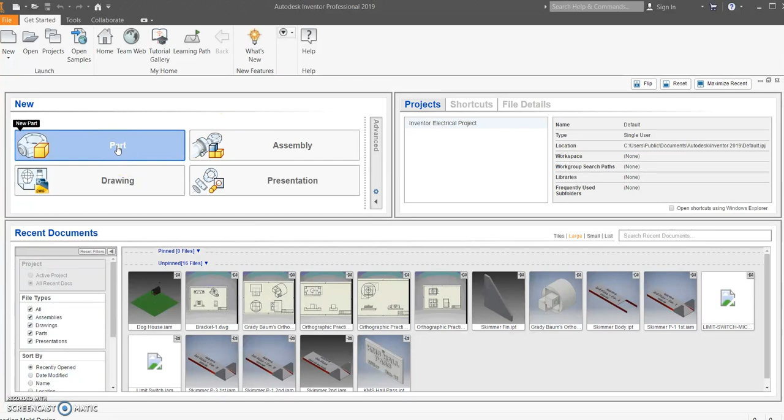What I'm going to show you how to do is make the house and constrain a roof on top of it. We're just going to do a part file, so click on part. This is the most basic way to make this house, and if you decide to do it more complex, that's fantastic. But for those that are struggling, it's just a basic way to make a house for your dog.

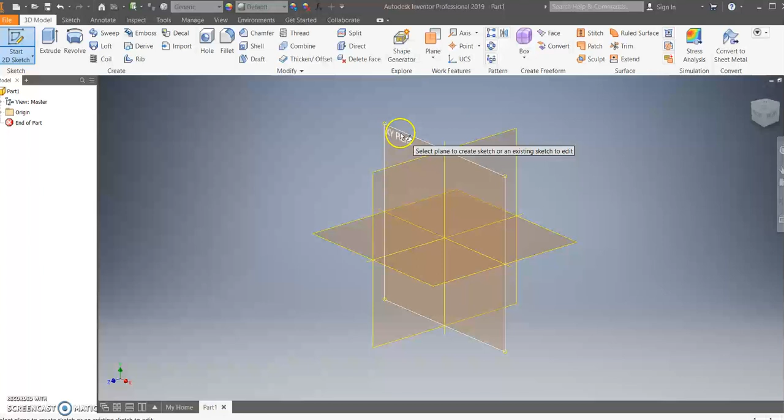Alright, so we're going to do a new sketch, start a sketch. You could either use the XZ plane or the XY plane, it does not matter to me. I'm going to use the XY plane, and then I'm going to put a rectangle, and in this rectangle I'm going to use the 2-point center, so it starts in the center and moves out. So here we are, start in the center, move out.

Now this is for a medium-sized dog, probably going to be about 18 inches tall, maybe 12 inches wide. So we want something that's big enough for him. Most of the dog houses that I've seen are going to be right around 48 inches. So we're going to go 48 inches and then push the tab button.

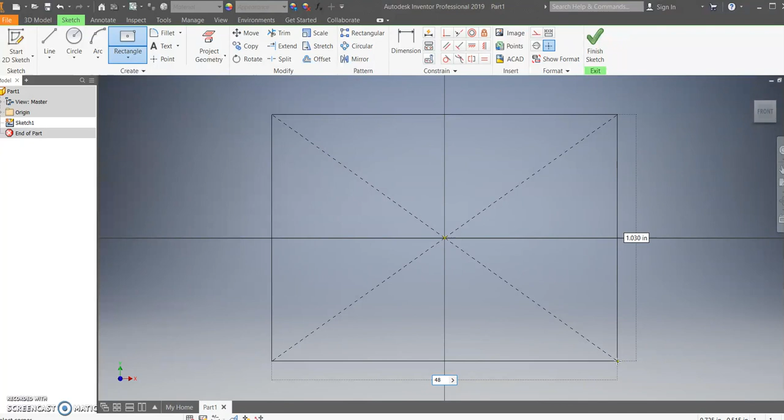And if I zoom back out, there's the other one. So we want that to be, we can make that 48 as well. So the 48 we already have is the front, and I'm going to make mine 60 inches deep - actually it's 60 inches tall. Finish the sketch, and then we're going to extrude that out.

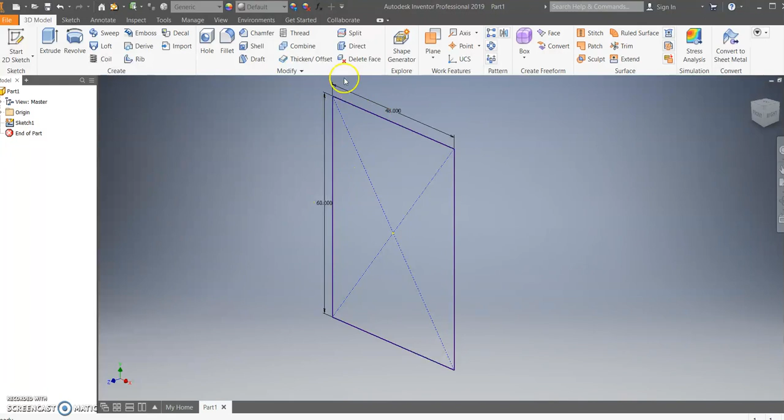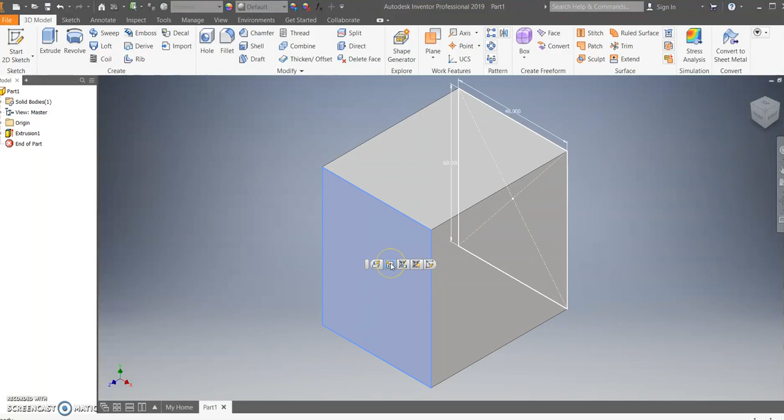And I want to extrude it out 60 inches. Now, I think that's too tall, so if I just do a regular click on the front of that, I get options that come up. You probably only have 3 options. I want to go to this second one, and it shows me my dimensions, and I want to change that 60. Let's do 40.

Okay, so I've finished the sketch. Now that's what my doghouse looks like. This is the front, sides, top. So what I want to do is shell out the top.

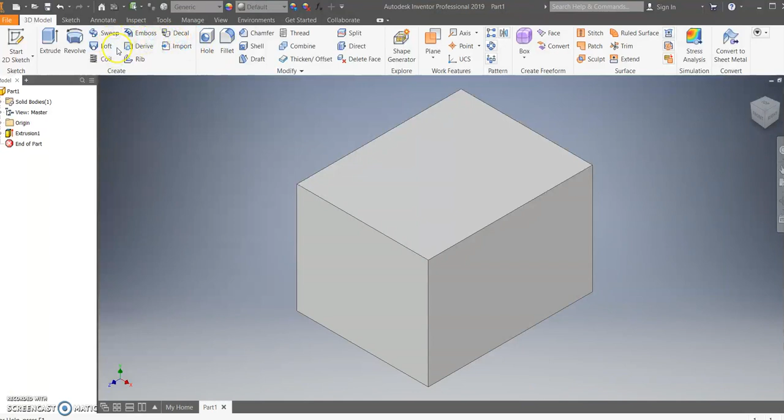Shell out the top. So here I'm going to click the shell button and then just click on the top. Now this 0.1 is telling me how thick my walls are. So I want a half inch thick walls, and I can even go 1 if I wanted - just gives me thicker walls.

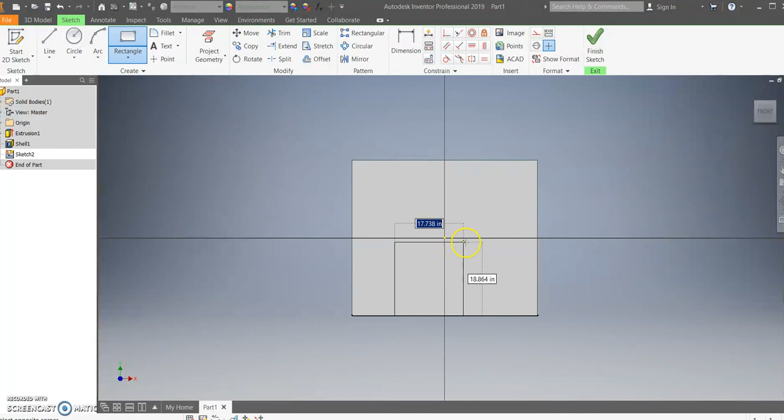Okay, so there's that. I want to put a door on the front, so I'm just going to right click on the front and do a new sketch, and there it is. So now I want to do a rectangle. This time I want to do just a 2-point rectangle, so I can start at the bottom here, and you can make this whatever you want.

So I'm going to dimension this. Again, my dog's probably 18 inches tall, so I definitely want to go more than 18. Let's go 24. And then wide doesn't need to be as wide, so I could go maybe 18 inches, just like that.

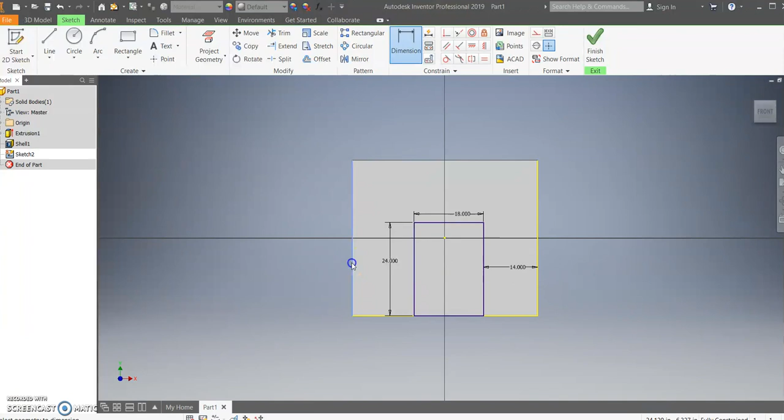Okay, now I just pushed escape to get out of the dimensions, and I can now move this to wherever I want. So I can dimension from here to here, make that 14, and from here to here should be really close. That's 16, so they both should be 15.

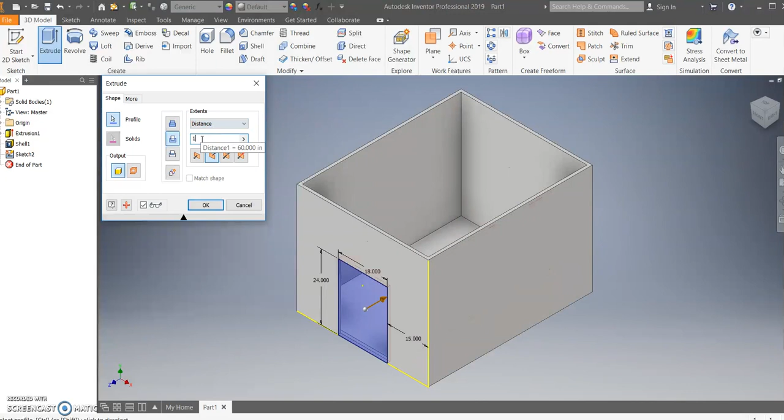So I'm going to exit out, click dimension again, and change that to 15. That'd put everything in the center. Finish the sketch, and then I'm going to extrude, and do this cut button right here. I don't want to cut through both sides, he just needs one door, so I'm going to go distance, and change it to - remember my walls are 1 inch thick, so make sure it's 1 inch. And there is your dog house.

Alright, so we're going to save this. I'm going to call mine basic doghouse, and save.

Now I want to put a roof on the top of this, so I need to do a new - I can go back to my home and start another part file. And on this part file, again, do a new sketch. I'm going to do the XY plane again, and just make a basic triangle.

So I could do underneath rectangle, go under polygon, and instead of 6 sides we want 3 sides. When that's selected, then I'm just going to do this. There it is. And now I want to dimension the bottom.

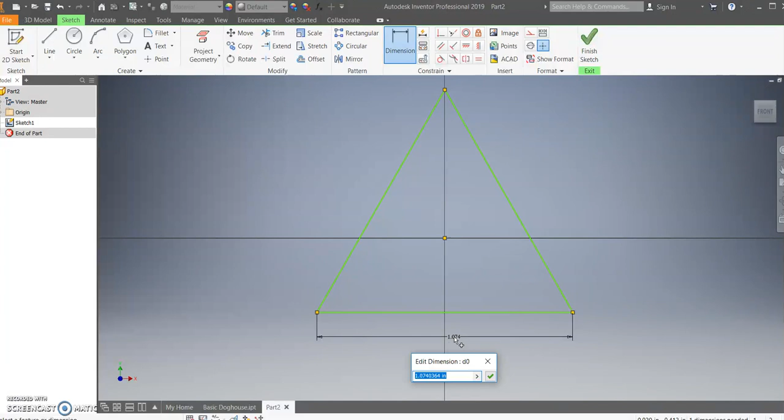So I think the width of my doghouse was 48 inches, if I remember correctly. So I'm going to finish that sketch and hit the home button. There's my 48-inch triangle. Now I'm going to extrude it out, and I think that it was 60 inches long.

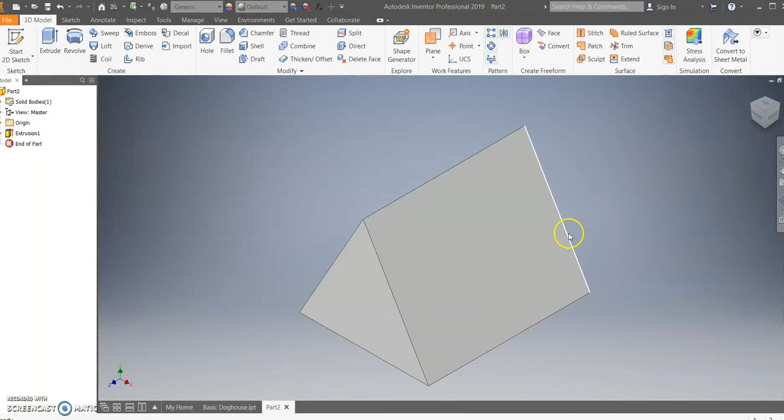So there's my doghouse. So I'm going to save this. Save this as basic doghouse roof. Basic doghouse roof, and save.

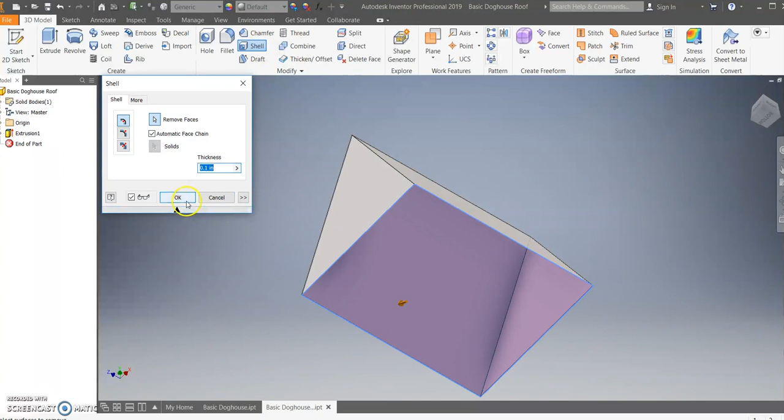Now I could also shell out the bottom of this, so I can click and just move that to the bottom, and I can shell out the bottom, say OK. Now I've got this roof that has no interior.

Okay, alright, so I'm saving that. I'm going to go back to my home. Now I need to put the doghouse and the doghouse roof together, so I'm going to click Assembly and start a new assembly.

And up here where it says Place, we're going to click Place, and then I want to put my basic. I need to make sure you're in Documents. That's where everything's going to be saved for you. So basic doghouse.

There's my basic doghouse, and then click Place again and go to your basic doghouse roof, if that's what you called it. And there's my roof. So I'm going to say OK.

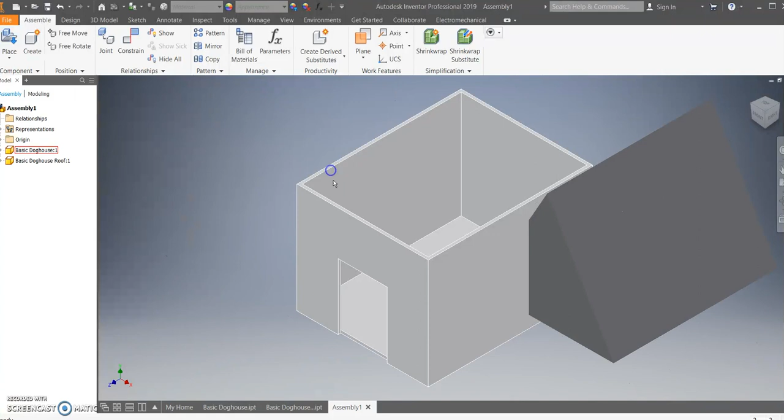Alright, so now we're going to constrain the roof to the doghouse. So I'm going to click Constrain, and I want to put it right on top. You see that? So there's a ledge. Remember, that's a 1-inch ledge there. So I'm going to click right on that ledge.

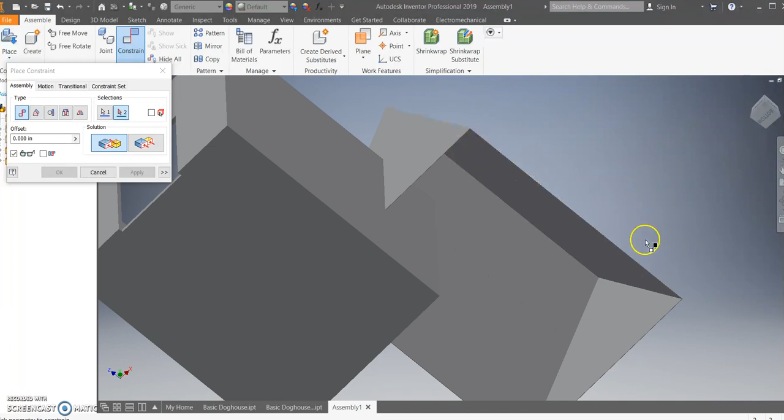And then I want to click on the very bottom ledge of the roof, so I really gotta zoom in. See that? See, this is the bottom. I'm going to really zoom in on that bottom ledge and click right on that. And see what happened if I click OK. This now is on top of that, and that's what I want.

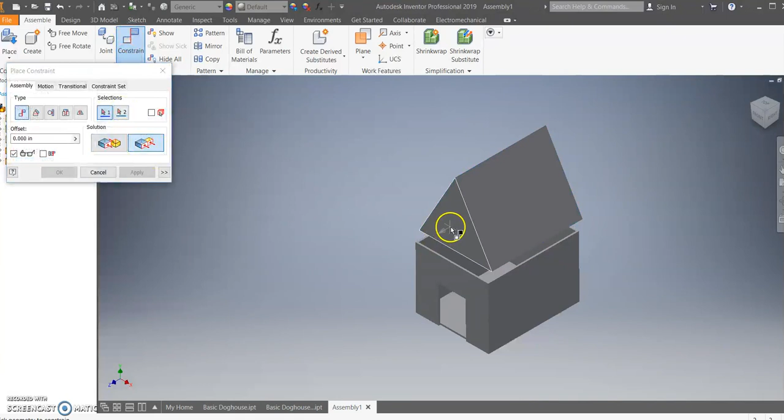Next one's really easy. I click Constrain again, but this time I have to flush the front of it. Front to the front, just like that. Okay, now if I click OK now, this thing's going to move back and forth like this.

Alright, would you click on this, see if it turns blue, and then right click and ground it so it doesn't move. So now the only thing that moves is this.

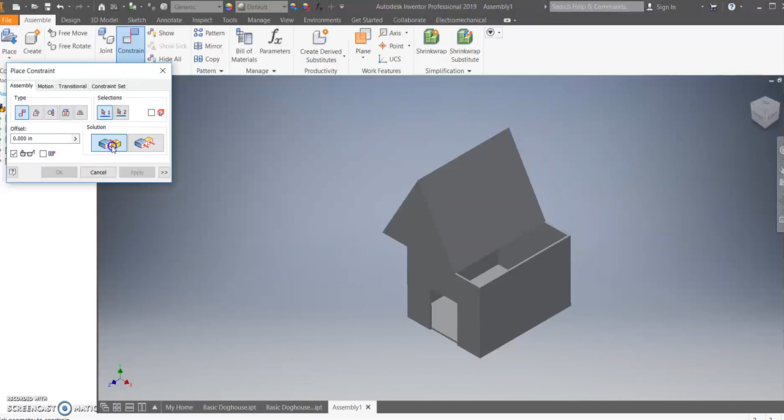And the last constraint is going to be a mate. Normally it's a flush, but because we have an angle here, we have to use another mate. So I'm going to zoom in. See, when you turn this, just that line shows up. That's what we want. Just hit the line and hit the side. And click OK. And now we have our doghouse.

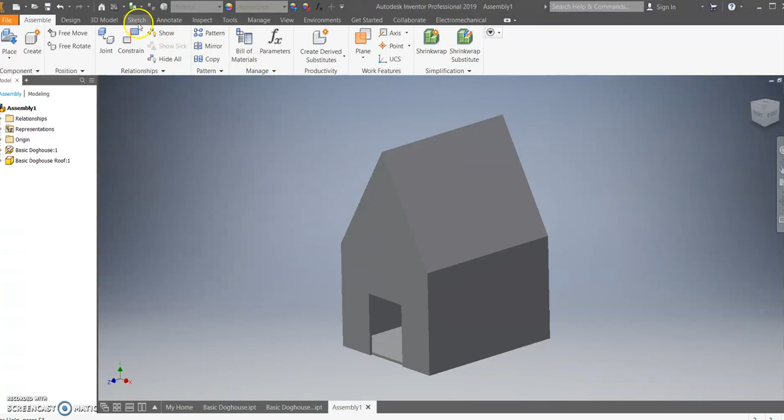Okay. And now you can change, if we go up here to Tools and Appearance, and I can type in wood. It gives me all kinds of different wood options. So if I click that, it highlights my entire doghouse. It shows me what the wood finish looks like if I just hover over them.

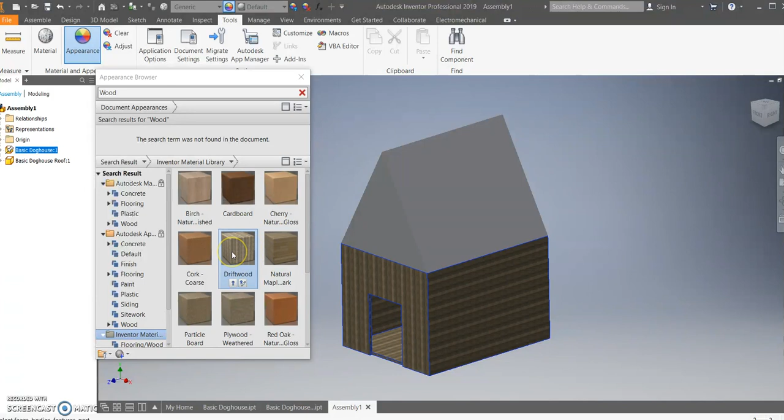So you can go through that and decide what you want. There's several options. Okay, so I'm just going to click that and we'll hit this arrow, and now that whole thing. And then I can change my roof a different color as well.

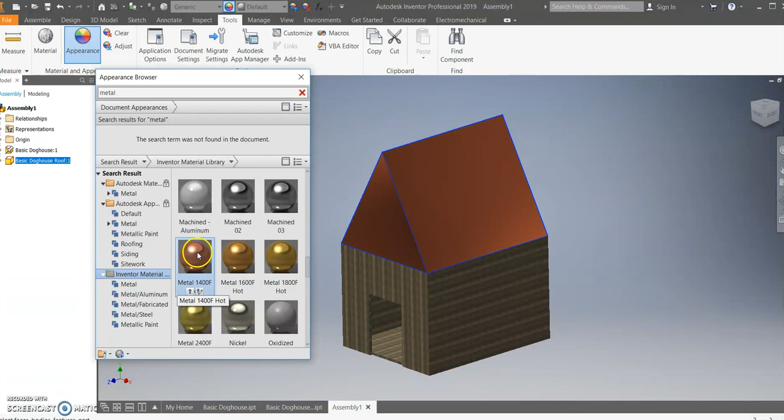I click Appearance, this is selected, and maybe I'm going to type in metal. And so it'll give me all kinds of different metal for my roof. You guys can choose anything you'd like and say OK, and now I have my doghouse on there.

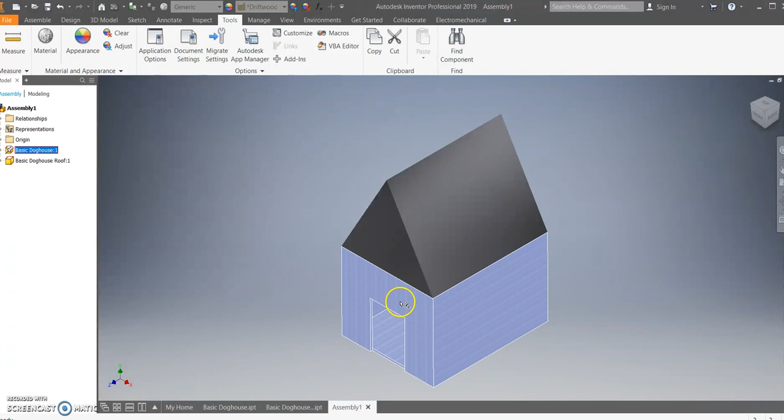Alright, now if I want to do my dog's name on here, I'm just going to click on my doghouse. It turns blue. I'm going to right click and I'm going to open it up, and then I'm going to do a right click on the front of this and do a new sketch.

And here's where I want to put a text, so I'm going to put my dog's name on here. Say my dog's name is Tucker. And then I'm going to highlight it. Right now it's 0.12 inches, and I need it to be at least 4 inches.

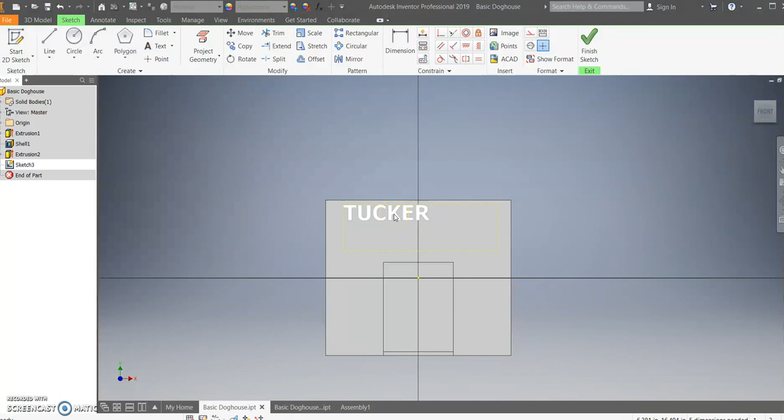At least. And then bold. And say OK. And there it is. Now if I push escape, I can go back here. I can double click on Tucker again and center that both directions, and there it is.

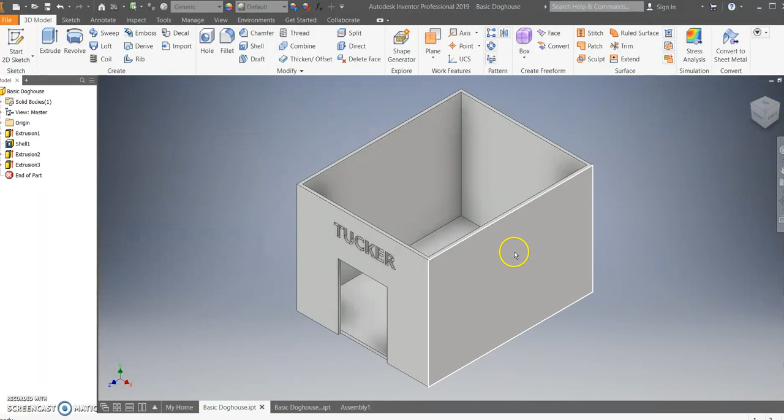Say OK, and then I extrude that. You can either cut it out, which I think would be kind of cool. Say OK, and now Tucker's name is cut out of the wood. So if I go back to my assembly, Tucker's name is cut out of the wood.

That's kind of neat. Alright, so let's save that as Doghouse. I'm going to call mine Basic Doghouse. You can call yours what you need to. And that is your basic Doghouse. Okay, hopefully that helps you.